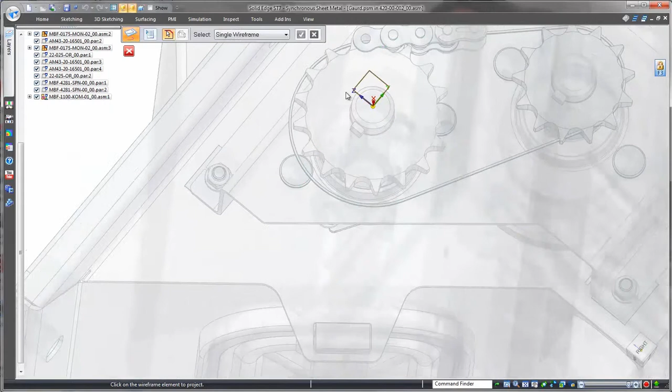Watch as construction of the safety guard begins as a sketch, referencing geometry from the adjacent product structure. Once we have a region encompassed by these curves, we select it to create a sheet metal tab. Solid Edge automatically assumes that a tab is the basis for sheet metal work, so no specific command is needed.

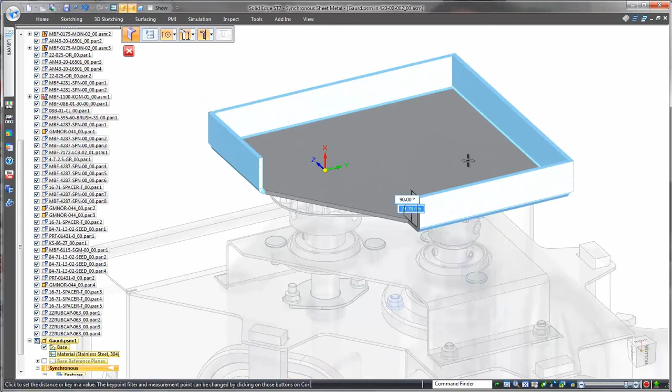Continuing to lean on the inherent intelligence within Solid Edge, we'll create four flanges by selecting and simultaneously dragging appropriate thickness faces, using a corner point from another component to define the flange length. Again, work directly with geometry.

That's creation in Solid Edge. We'll quickly define a jog to prevent interference. Solid Edge commands are intuitive and fast.

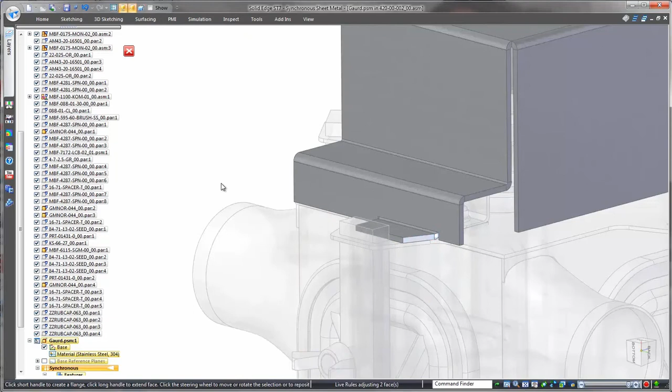Partial flanges can be defined and customized via the innovative heads-up command interface. Design intent is incorporated by relating faces. When flange sides need to match those from adjacent components, the handy radial menu initiates a simple sequence of picks to get the job done.

Solid Edge makes easy work of reorienting and extending flanges, often removing the need to measure angles and distances. For visual face modification, the handy steering wheel is always available. And when driving dimensions are necessary, it's easy to place them on the 3D geometry and change them as needed.

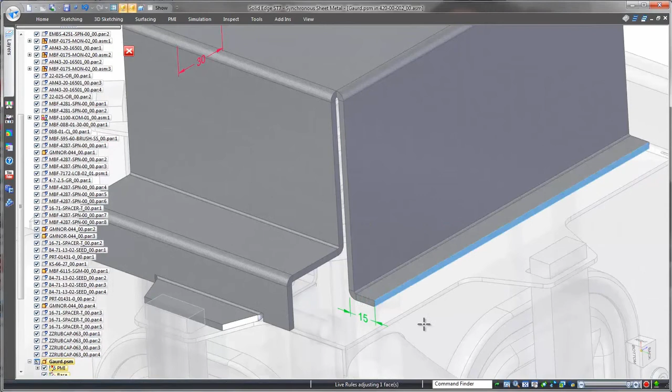Using surrounding geometry, creating sheet metal features like this dimple is fast and accurate.

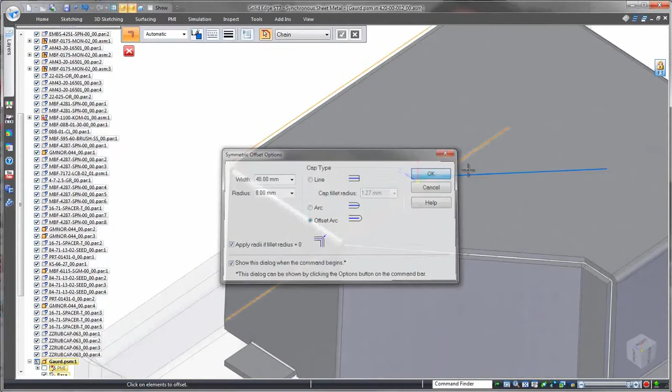For manufacturing purposes, Solid Edge flat patterns always show the most efficient cut sheet size, and that's great for nesting.

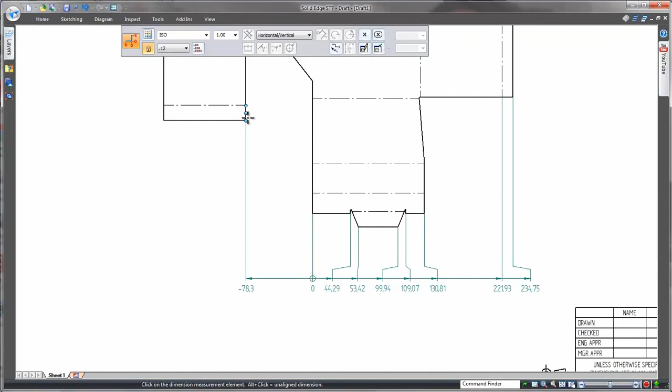The Solid Edge drafting tools facilitate creation of dimensioned drawing views fully associative to the model. Note that as we close the drawing and return to the assembly, the guard is placed in all three locations in the meter box. Solid Edge contains a full set of sheet metal construction commands.

Watch as a rectangular to circular plenum in the blower fan assembly is lofted between existing parts.

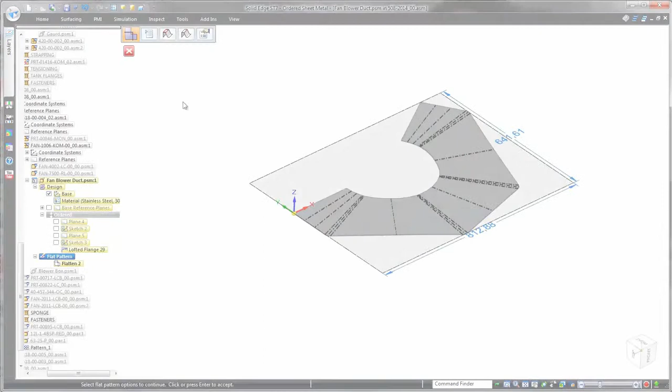Another strength of Solid Edge is the ability to wrap sheet metal around a solid part. This conversion of solid block into sheet metal is especially useful for complex shapes, as solid modeling is often faster and easier. Now that's productive.

To integrate with your CNC machinery, Solid Edge flat patterns can be exported into a DXF format with intelligent layer control.

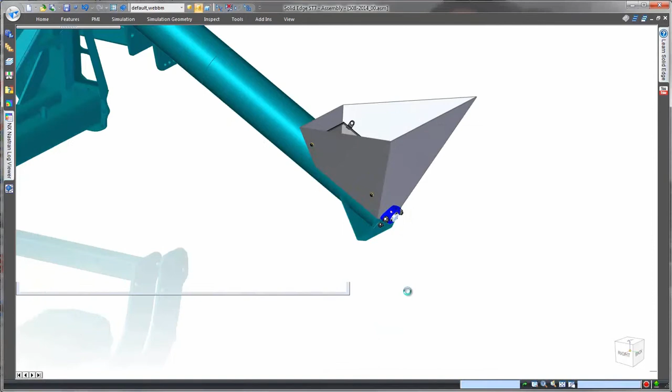Direct interaction with surrounding geometry, coupled with industry-leading design tools and innovative modeling capabilities, makes Solid Edge the choice for companies looking for an edge over the competition. Solid Edge. Design better.